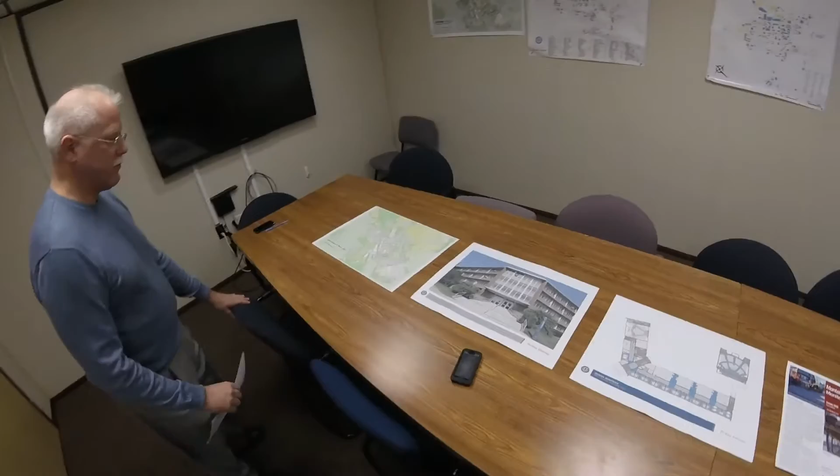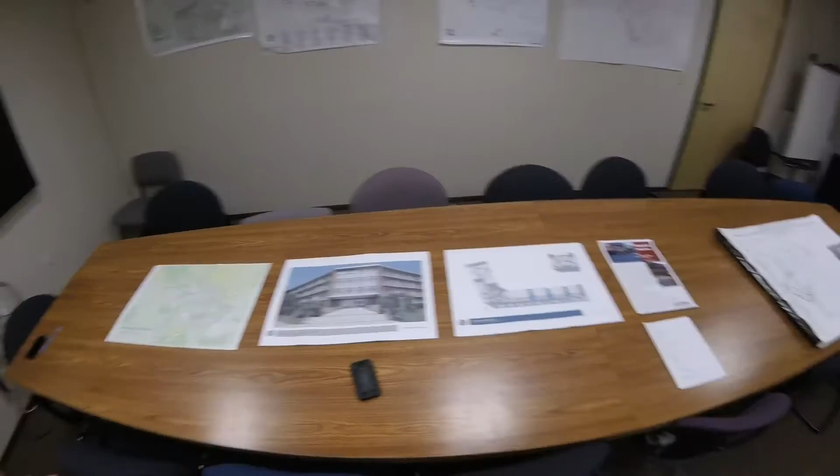We're about ready to begin a series that will take you through the construction process on the Monteith renovation project. Tom was our design project manager. Our first series starts with the design, and then once a month we plan on adding a construction video to our website, so you'll be able to keep track and stay in tune with the progress of the project. Tom will take us through the conception, some of the history, and preliminary design. This will be our first video, and we will continue through construction. Tom, thank you so much for spending some time.

Let's start with the building and its siting. Monteith and its sister building, Arjona, face Mirror Lake in the South Campus. Arjona was renovated about 1.5 to 2 years ago. Monteith is currently under construction. These two buildings were originally considered to be swing space for the university as other building construction projects ramped up. But in the middle of the design process, it was determined that the math department would move into Monteith, so the building was reprogrammed in a more specific way, which we'll talk about as we move through this presentation.

Tom, will the math department be permanently in Monteith, or only for the duration that the renovations are happening in Gant? This is planned to be their new and permanent home.

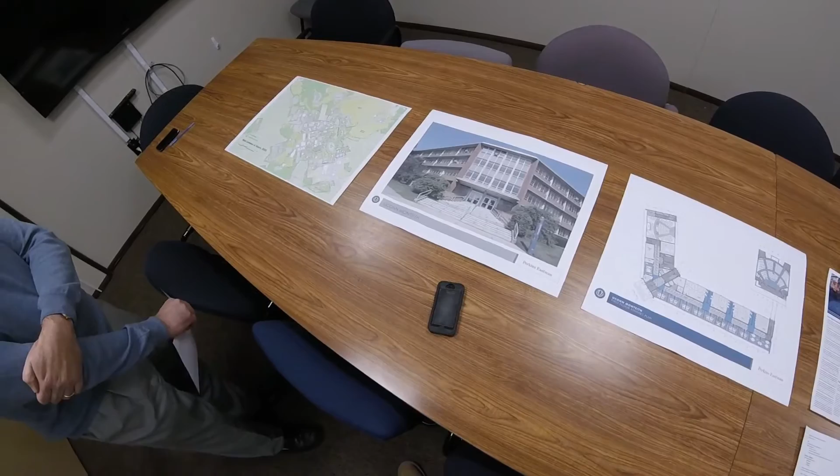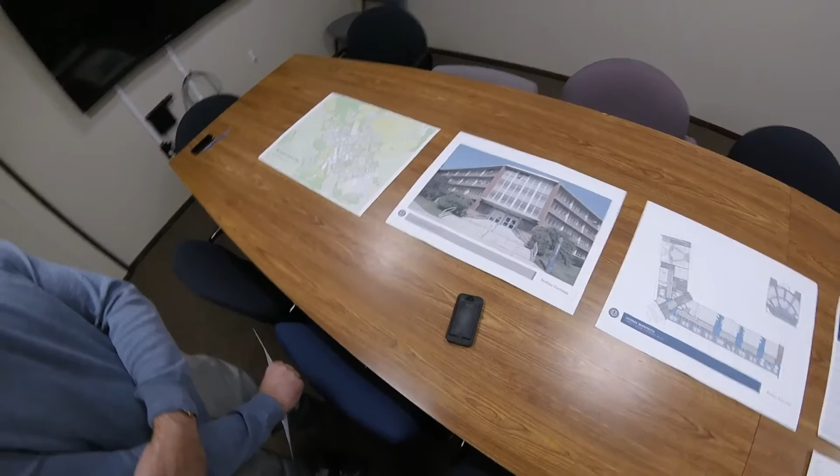So this is the front elevation, the before and after of Monteith. We used this when we started the design process to document where we are. Essentially, it's going to be the after photograph as well, because the outside of the building won't change very much. The front steps in this area will be rebuilt. The window air conditioners will go away and new air systems will be put in, and architectural screening similar to that on Arjona will be put on the roof to conceal mechanical equipment. So very similar to Arjona, the stairs get all rebuilt, but it will pretty much look the way it does today. It has the same shape, it'll just be tightened up.

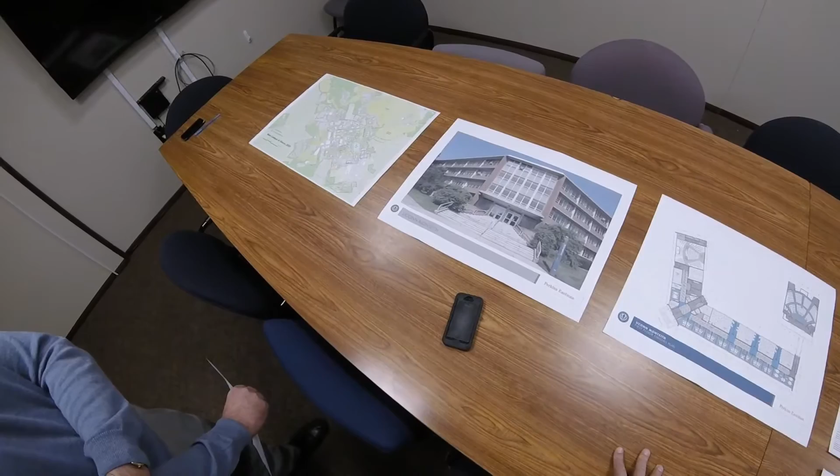Before we go there though, the primary improvements on the outside are for site amenities: walks, steps, ramps, benches, bike racks, and new landscaping. A significant part of this project was the retention and protection of all the mature trees that surround this building. There's a very large tree in the quadrant area, a big beech in the back, a redwood along the Whitney Road side, and there are mature oak trees. So we're preserving what we can and enhancing what we can't.

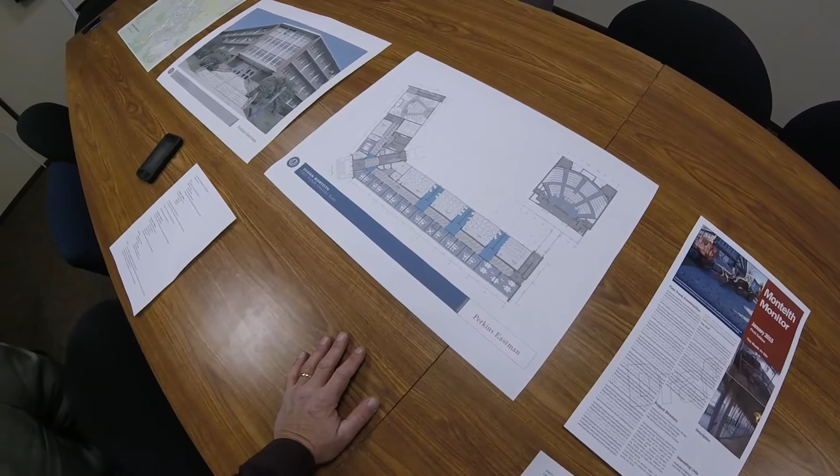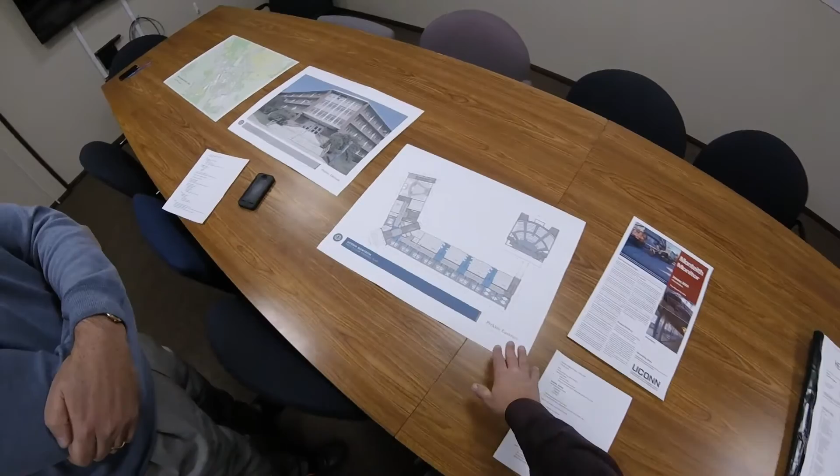Tom, generally speaking, it's a 4-story building. Are the floors similar? The floors are almost all identical. It's a 4-story building of about 68,000 square feet, and there's an additional building, the Schenker Auditorium, which is another 5,000 square feet, located in the northwest quadrant. The building is essentially a simple construction of a structural frame with a center bearing wall. While the outside won't change, the inside of the building will be completely brand new. We're demolishing everything except the structural elements and the stair towers, and providing upgraded structural systems for seismic capabilities, plus all new partitions and finishes for the interior. We're providing new restrooms, complete new mechanical and electrical systems, and the data telecom systems will be state-of-the-art, to the new university standards.

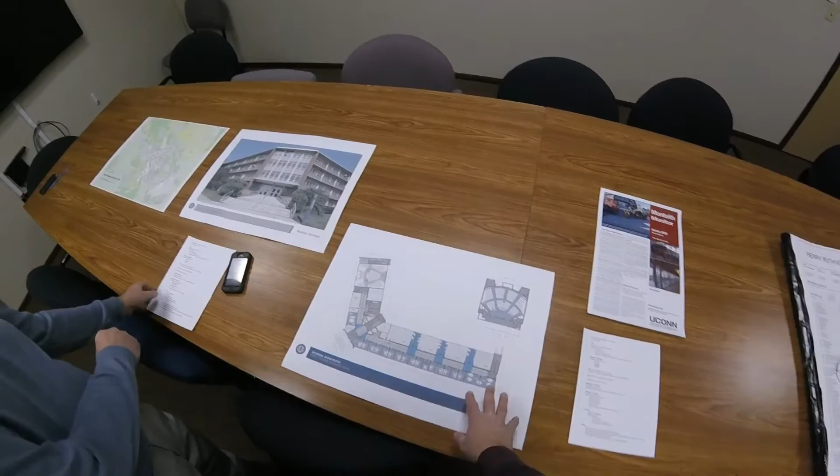Tom, take us through the general layout, how the building will flow and what students can expect going forward. This is the entrance floor of the building, floor 1. Here's the entrance facing Mirror Lake. There are two wings, a short wing and a long wing.

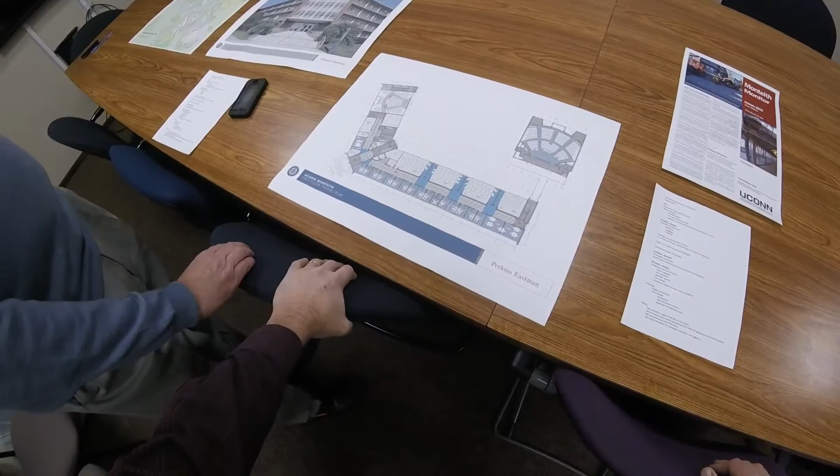The lecture halls are both located on this level, one inside the building, Monteith, and one outside the building, Schenker. The faculty offices are a bar that always faces towards the lake or towards Arjona, and the classrooms are in a bar which faces the courtyard and the great beech tree.

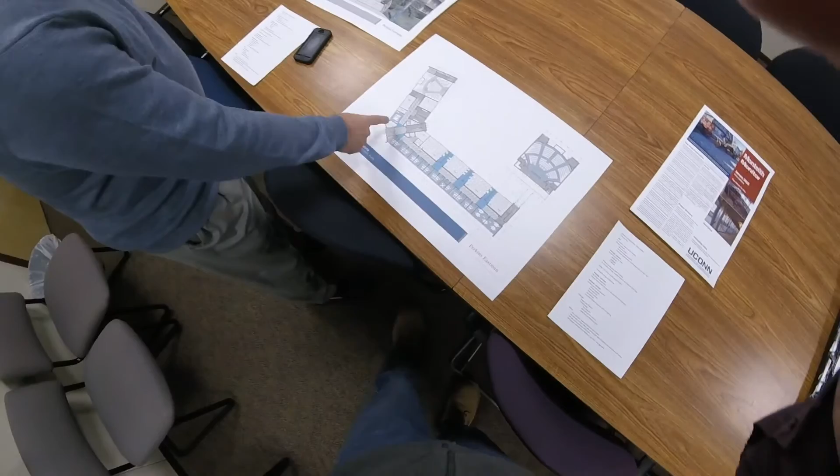This stacks up primarily the same through four floors. The primary exception is that the math department offices are located on the second floor. The area we call the knuckle, over the primary entrance, becomes collaboration spaces on floors 2 and 3, and an open student lounge on the fourth floor.

So the new teaching stations or classrooms will be high-tech, with all modern-day AV and data, to university classroom standards. The classrooms will house about 45 people each.

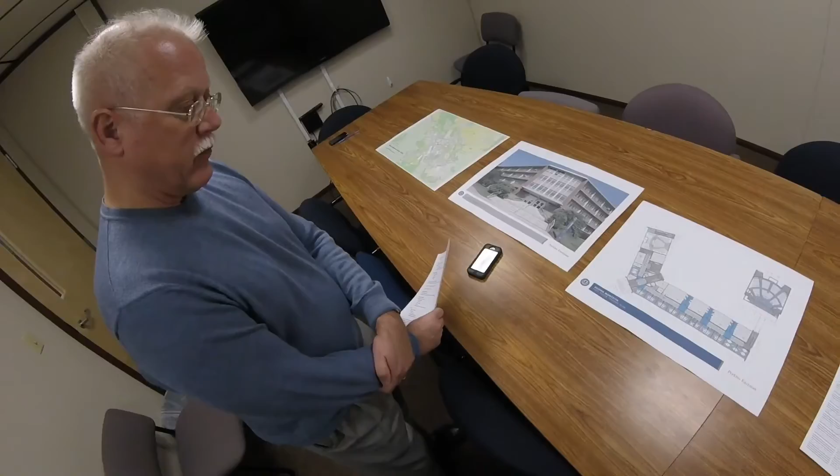There are 13 classrooms plus the 2 large lecture halls, which will hold 200 in one and 350 in the other. The lecture halls will have all modern-day new seating, ceilings, AV, and lighting — a complete reconstruction, brand new.

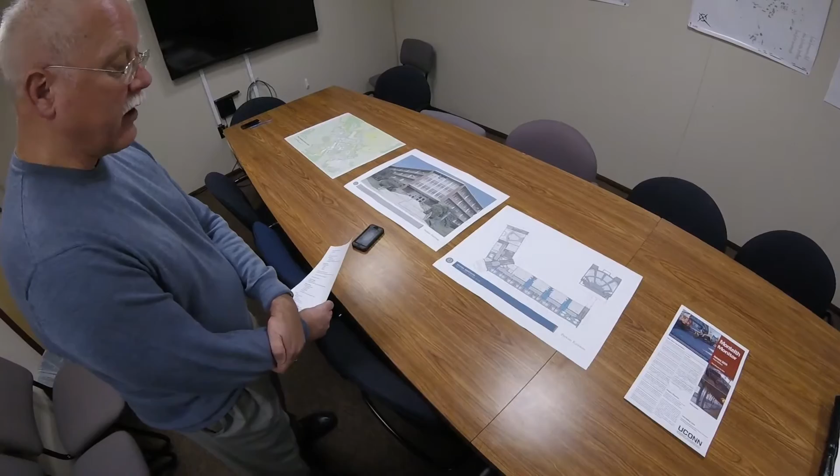One of the big issues we faced with the Monteith project is that about a month before we finished our construction documents, we had a severe flood in the building, which flooded the entire basement, including the electrical service and elevator equipment. The flood poured up to the first floor level and damaged finishes there.

So by the time we were done evaluating the damages and what the repairs would be, we elected to make some improvements to the building.

Originally we had planned to use the existing elevator, but we are expanding it, providing a new cab that is ADA compliant. In the same way, we're providing a new UITS service entrance for data and telecom, and a new primary electrical service, beyond what we had originally planned to do.

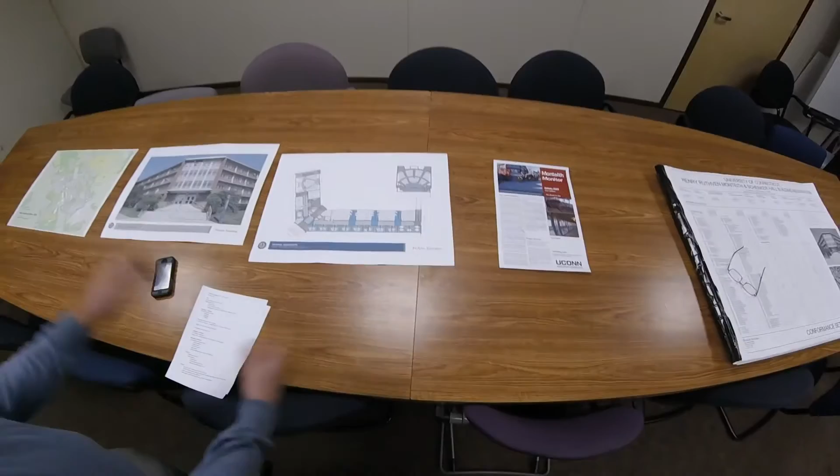Last year, during that severe cold snap, the building was unoccupied and a water service froze in the basement and flooded out. Actually, the shutoff valve blew apart under the pressure of the freeze-thaw action from the main in the street and poured water into the basement. But we are beyond that now.

One thing I will say, even with the setbacks from the flood and a very aggressive schedule, we were able to bid this significantly below our estimated cost of construction, and include amenities like a new elevator and new upgraded lecture hall seating. The contractor for this project is KBE Construction.

They're also building the new STEM dorm up on Alumni Drive, up on the hill. It's going very quickly. They have a 10.5-month construction schedule with completion due in July of this summer for both projects. And we will have the math department, knock on wood, moved in by the middle of August.

2016. Wonderful, wonderful. So this is actually, Tom, a little bit later.

Normally, going forward, we're going to do a planning video and then go into construction. This project is already into construction, about 40% complete at this time. I've actually started some videos, so when we pick up in our construction photos, it will be a little bit further on. But it is so perfect to give our viewers an idea of what happened, what were the thought processes in designing, and how we got to where we are today.

We were very fortunate on this project that we had a really focused design team and a really focused university team here at AES, so that we could get through this cleanly, because every decision and milestone on this project falls backwards from occupying in summer of 2016.

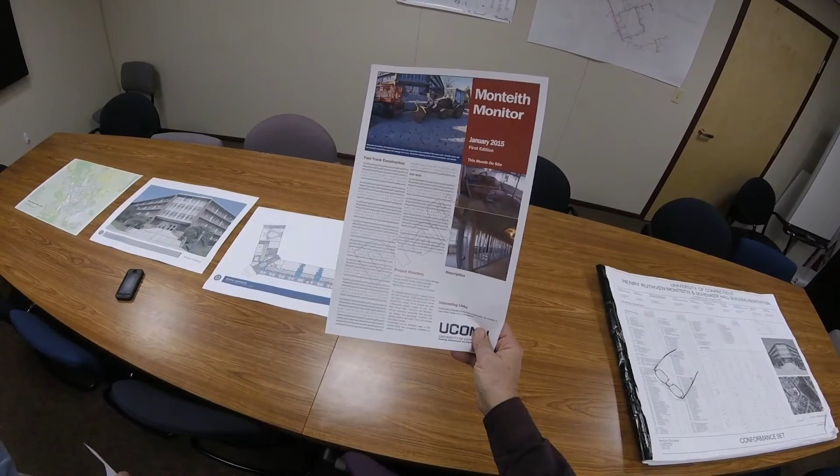One of the things you can look forward to, hopefully soon, is a newsletter we'd like to put out called the Monteith Monitor, that will describe some of the aspects of construction and schedule issues that are coming up. This is a draft that's partially complete. We expect to release this in a couple of weeks along with this first video.